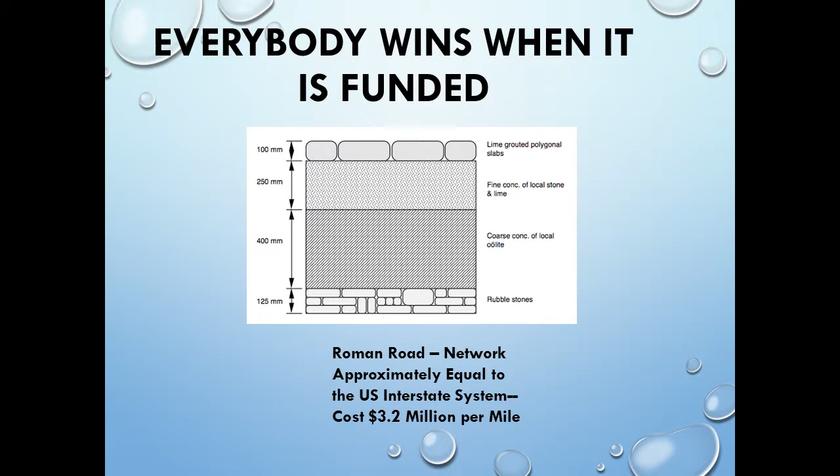They actually conquered the world at that time, and they did it for military and for commerce—it wasn't just for war. They knew they had to have good roads.

So if you haven't figured out, the first two presenters just set this up great, and thank you very much—it made me feel good. So I always use this slide.

What you look over there where you see the little cloud, that's the Highway Trust Fund, 1993. I'm going to walk you through the implications, and there are actually 3 of them. You'll see the different consumer price indexes for the different products.

So there's a couple of messages here. We do life cycle costs going out 30 years, 50 years using consumer price index, but it doesn't map back anymore to the different products. So that's something we've got to do differently. But look where that big cloud is in 1993 on the trust fund.

What you're looking at on the bottom is the time scale. The vertical axis is everything back to 1958 dollars. Nothing big there—what does that mean?

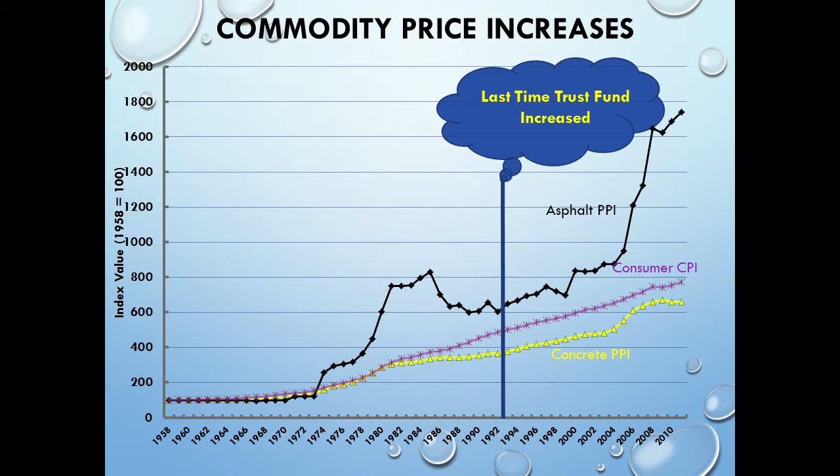This room, we all got together in 1993 and said, let's fix 100 miles of road or build 100 miles of road. We'd have a cost, we'd go out and do it. If we try to do that today, we can only build 67 miles. We've lost 1/3 of our buying power. You've heard that before, and that's what everybody talks about.

Look at the bottom side—I'm calling it the Arizona consumption rate because I do this for individual states. I'll show you a U.S. rate, but in '95 we drove about 40 billion vehicle miles, and in 2014 it's about 60 billion. That's a 50% increase in wear-out rate and 1/3 loss of buying power.

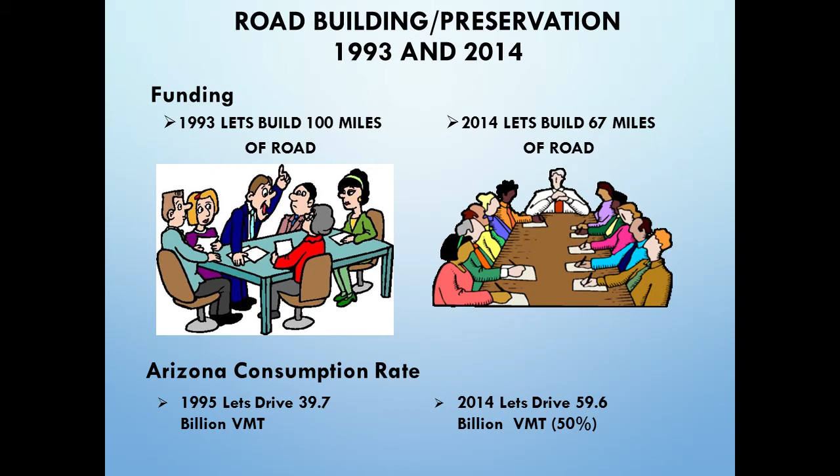Two of the three things—can't win, you've heard this argument before. So here it is nationally. If you look at the green line, that's showing you the vehicle miles of travel. The brown is showing you new construction. Obviously this trend is not going to change—we're going to keep having more and more wear-out of our roads.

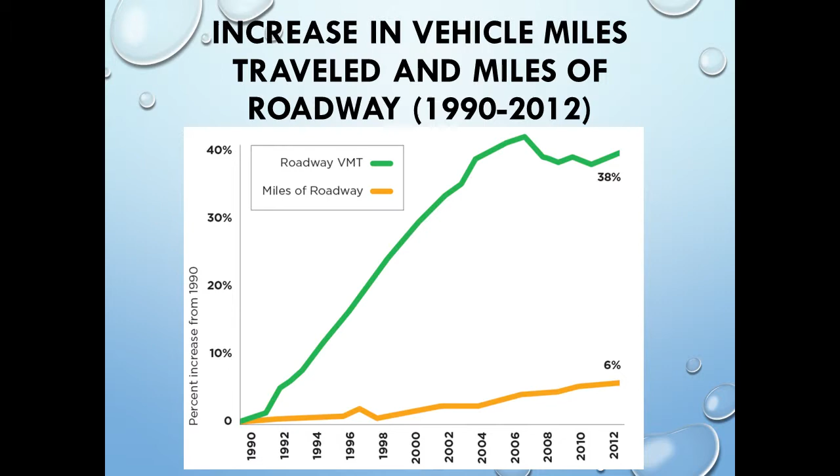Well, here's the one that doesn't get talked about much. I've shown the gas tax again in 1993 in brown, and you'll notice both lines—the blue one is the car. This is legislation mandating the fuel efficiency of vehicles. The blue is cars, the red is light trucks.

So we've been humming along, perfectly horizontal till you hit about 2010. In 2010, look at number 8—new car and light truck standards established for 2012 and 2016. Notice it's starting to shoot up. Now I drive a 1998, so I'm still smoking up the world with bad fuel miles, but eventually the fleet is going to catch up with us.

So we have less buying power, our wear-out rate is increasing, and now we're not going to generate the funds because of fuel efficiency. And if you look at number 9, 2017 to 2025, look where that's going.

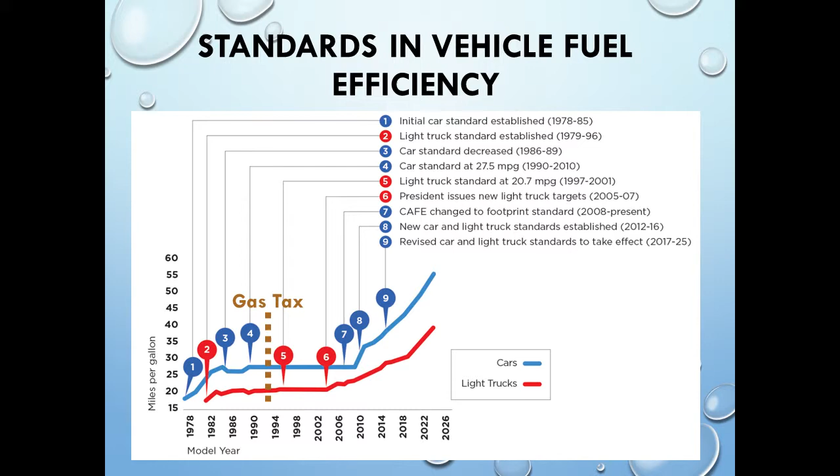And that's by legislation. So you can argue that Congress passed transportation legislation, though there's questions of whether it's funded or not. So this is my message: every one of us needs to pass the message on funding. We can talk about preservation all we want, but doing less with nothing isn't preservation. We've got to go back to planning and programming and have a vision of where we're going. That's one of the messages I'm going to leave.

Now, I'm supposed to be talking about urban. Okay, what is urban? I left New York and moved to Arizona, so I left farm country and went to what is now the 6th largest city in the United States. I think I'm rural, used to actually be on a ranch at one time. So everybody thinks that way out west - we're all rural, we're not like back east.

So the first thing I went to is Wikipedia. That's who gives the best definitions. And if you look at the European version, you have hamlets and villages and a whole bunch of cool stuff like that. I said, that probably doesn't apply.

So I went to the census. The census defines it as 50,000 people or more is an urban center. It doesn't give geographic range, or if it did, I missed it. But they call urban clusters 2,500 and more. So if I go 2,500 up, that's almost all of us, right? So everything I'm going to tell you applies to almost everything. And then I added the rural as everything else, because I don't know what that means.

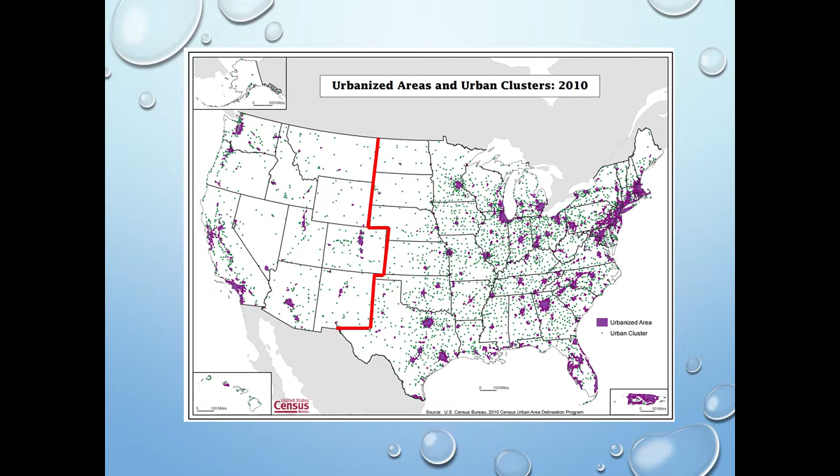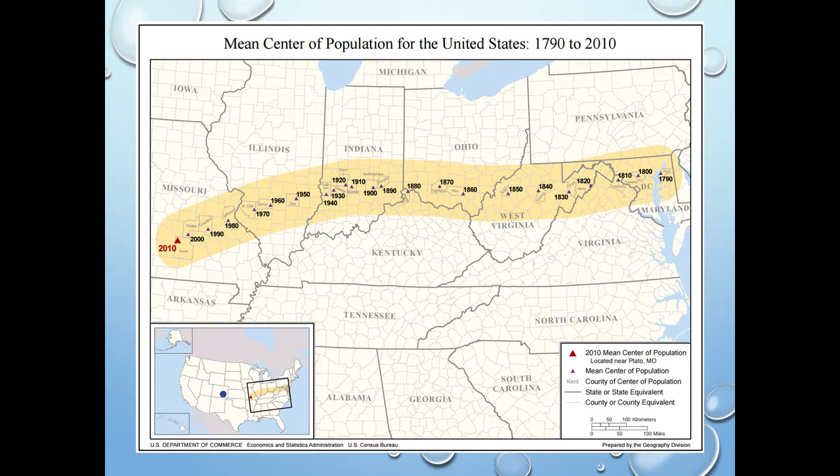Okay, this is when you know this guy spends too much time in motels. If you look at the slide in the lower left-hand corner, that's showing you how the geographic population center of the United States has shifted from the beginning. I put that little blue dot in there because probably in another 50 or 60 years, it's going to be in this region. If you look at the top, you can see the years by which it did it. I was actually stunned when I came across this, but people really do spend time on some of this stuff. But anyways, we're not as far away from the rest of the country as we think. It also explains a lot about Congress.

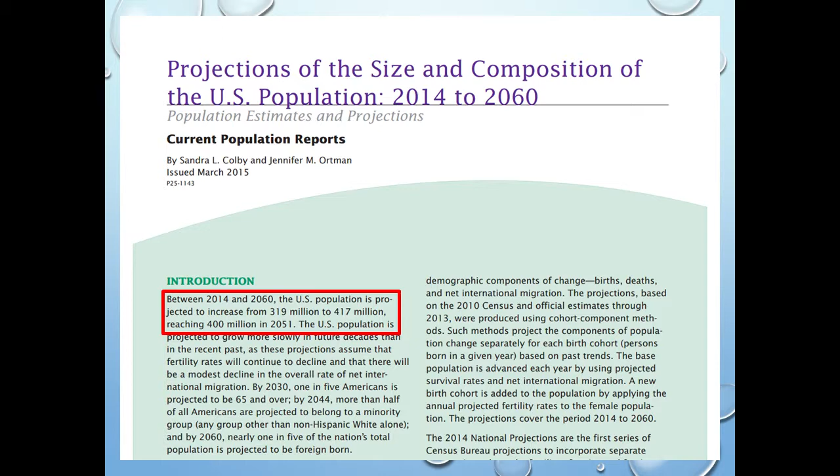This is another 2010 slide. This is showing you the high density places, and I'm going to show this slide near the end of the presentation. If you look at the bar right here, on the far right hand corner, that represents 20 million people. So like LA is 15 million people. The reason I say that is preservation treatments in those areas are different - the treatments are the same, but how you go about it is different. I'm going to talk about that. So when we say urban or rural, the same treatments are used in all the different areas. There isn't any magic out there. The application of those and the product selection is what's different.

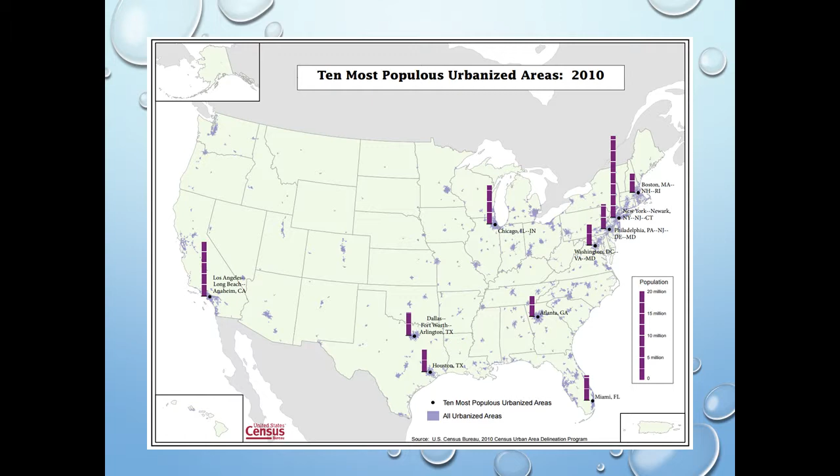I'm going to go into that later on. This is an FHWA document, I think you heard quoted earlier, and I'd recommend everybody read it. The only thing I didn't like about it is all the solutions were mass transit, but like I said, I'm a rural guy. It's a very good document for opening your eyes up, because most of us don't think about the road down the way.

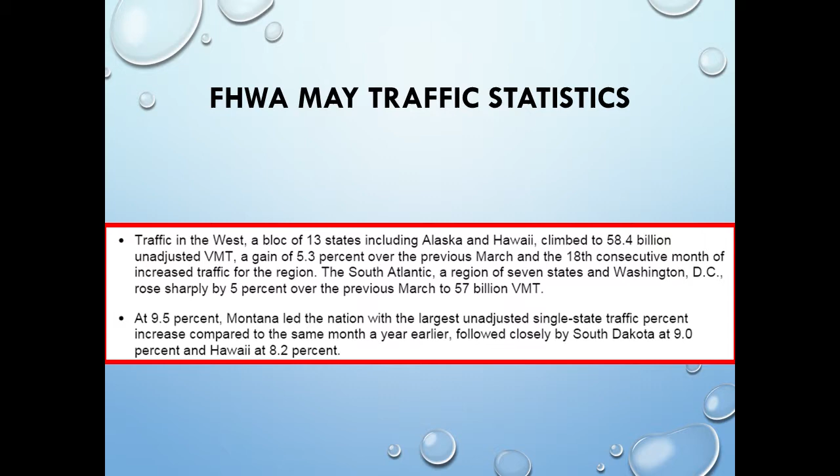So I'm trying to deliver a message here. If you look at the two bullets, traffic in the west, a block of 13 states including Alaska and Hawaii, climbed to 58 billion unadjusted vehicle miles of travel. Okay, if you look at the second bullet, at 9.5%, Montana led the nation with the largest unadjusted single-state traffic percent increase compared to the same month a year earlier. I would consider Montana rural. It's not.

Okay, there's the 70 million. So like I said, it depends where you want to get your statistics from. That's why I showed both. I don't have any dogs in this fight. But one of the other ones you see down there where it says you spend 40 hours a year stuck in traffic, I can show you another one that says you spend your 2-week vacation stuck in traffic. So if it feels like you don't have time to do anything, there's probably a good reason.

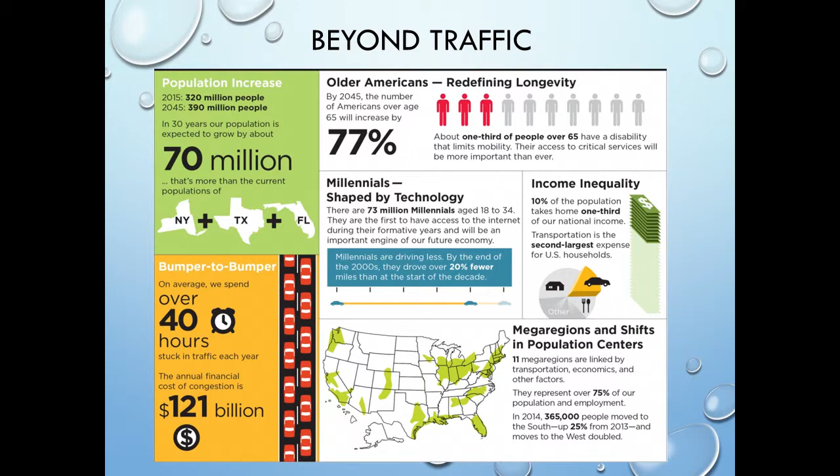And we heard reference to the major clusters. That's the lower left. Sorry guys, I can't... well, maybe I can do this. There we go. Yeah, you guys got a brain after all. These little green things are the major urban clusters. That's how they're envisioning them coming out.

Again, this is population - the darker, the higher the population change. I'm just trying to reinforce this idea. And here's the congestion. If you look at 2011 versus 2040, there's going to be a lot of peak congestion in the Rocky Mountain states. You're not going to run from it.

Okay, now we're going to get a little closer to preservation. The other thing I want to announce to you - next year is the 125th anniversary of the first concrete pavement ever built in the United States. And you're looking at a picture of it right there between those two red lines. That picture was taken in 1925.

Now these guys - to show you that life hasn't changed - the city wouldn't let the contractor do what he proposed. The city said no. He had to post a $5,000 bond in case it didn't work, just to go build it at his own cost. And he did, and it worked. How long did it take to set up? Actually, you could walk on it. It was more almost like RCC today.

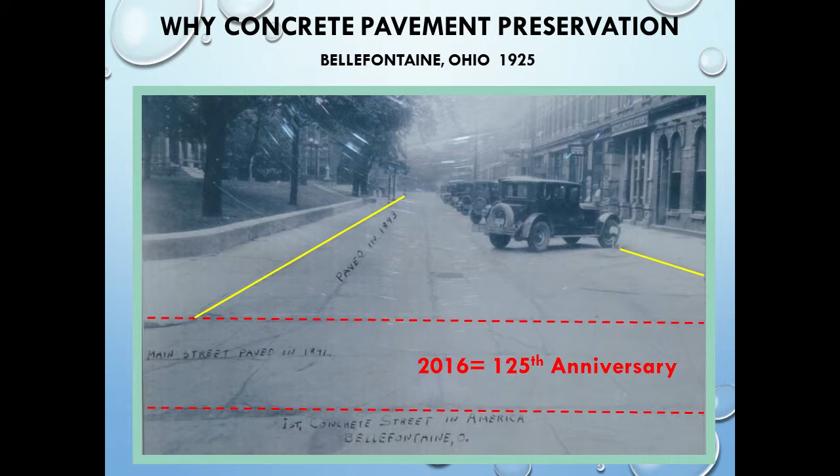It's 5 inches thick. So those yellow lines you see right there - next year will be the 123rd anniversary of the longest pavement preservation concrete project in the United States, probably the world. That project still stands, and that's what it looked like in 2012. So think about that. Point is, you can preserve pavements. You've got to have a plan. You've got to have a belief. It isn't easy - this thing looks tore up, there's no question about it. But it can be done.

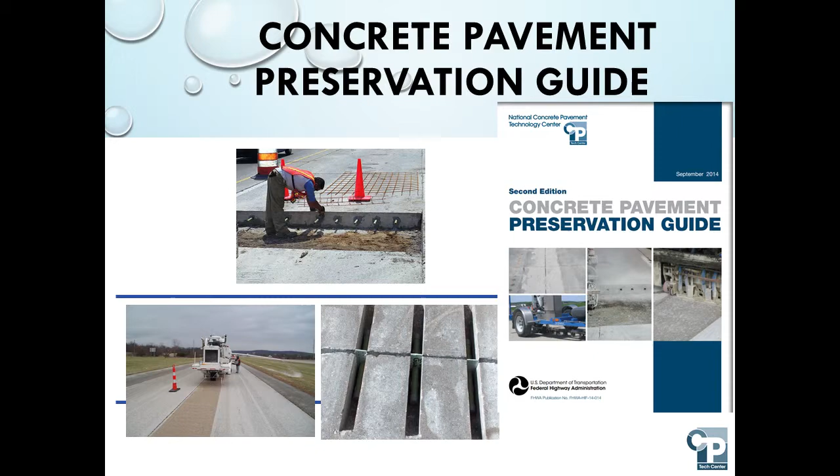Okay, taking it closer to preservation - if you want to get into concrete pavement preservation, the CP Tech Center in 2014 developed a manual. It's the best thing going. I would encourage anybody who hasn't read it to get it and look at it.

Okay, here's the typical pavement preservation treatments for concrete. And the thing is, if you haven't heard me before - anything you do to concrete pavement, I consider preservation. I don't get into the semantics of what that means, because the pavement doesn't care, it just wants me to make it last as long as I can. So what you're going to hear me use is the term 'best value.' I'm not so concerned with the point of what it's called when I'm doing it, as with what's the best value of when I apply it. And so that's what I try to dictate, how I think.

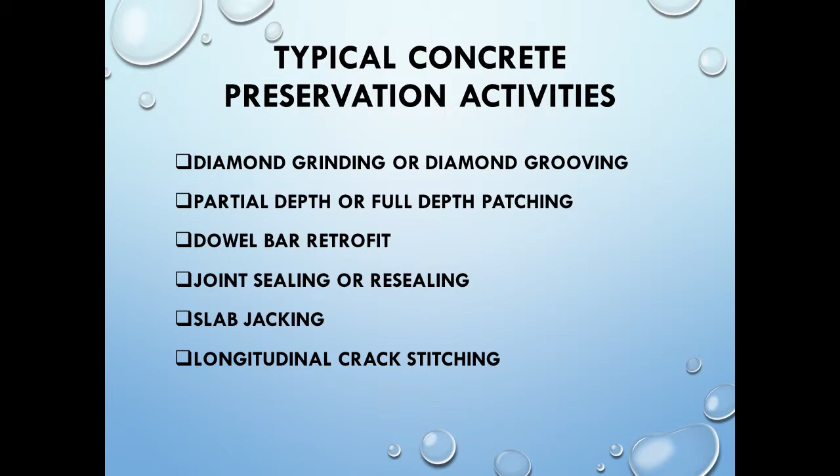So you got diamond grinding and diamond grooving, and they're two separate products, just so you know. Partial and full depth patching, we'll get into all these. Dowel bar retrofit, joint sealing or resealing, slab jacking, and longitudinal crack stitching. It's going to be the same treatments no matter where I do them, whether I'm out on a road of 500 ADT or 500,000. How I do it and go about it, the products are going to be quite different.

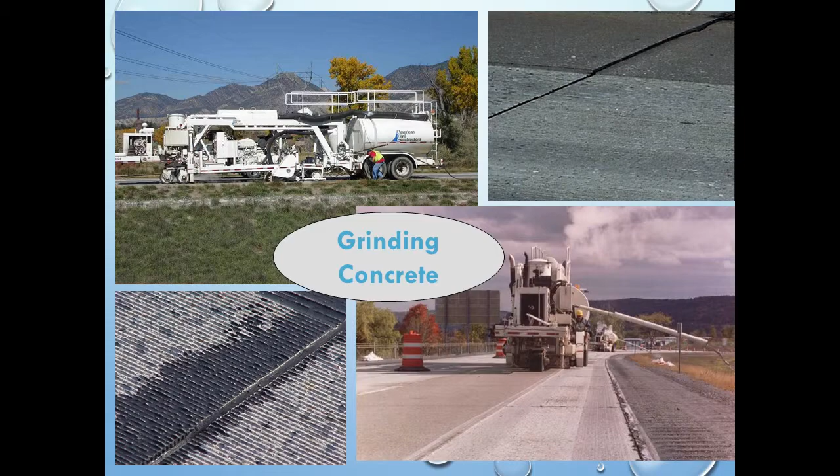Grinding concrete, one thing I want to point out, let's do it with the mouse. Notice this little guy right here, this is called slurry disposal. This gets harder and harder to do in urban areas. I'm going to talk about this more later on, but I just want to make sure you see that picture and how that's being discharged.

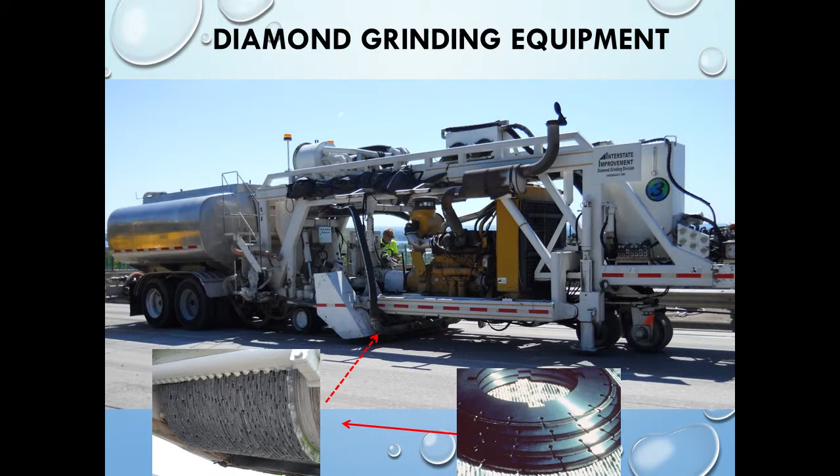If you had any ideas of what diamond grinding is, it's just a series of blades. You can see the blades, you stack them all together, it's called a head. It goes back up underneath. There's where you got the blades, you put them on a stack, the head runs this way, and it grinds this way. So you're removing a thin layer of concrete.

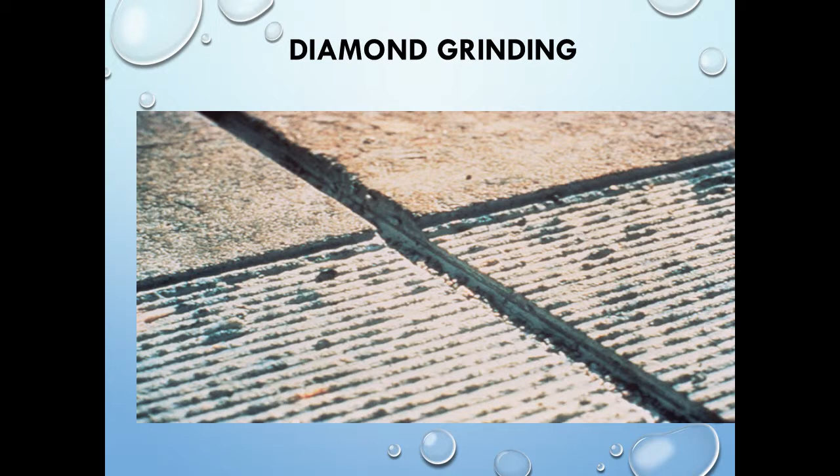That's what it looks like. This is the most used concrete slide in concrete preservation. Someday one of us is going to get out of the car and take another picture, and you guys won't have to look at the same thing. But mark my words, when you see me next time or the next guy... This one I think was taken by Matt Ross back there, is that right? So Matt tried to get us to change, but again, I'm just trying to show you the corduroy texture.

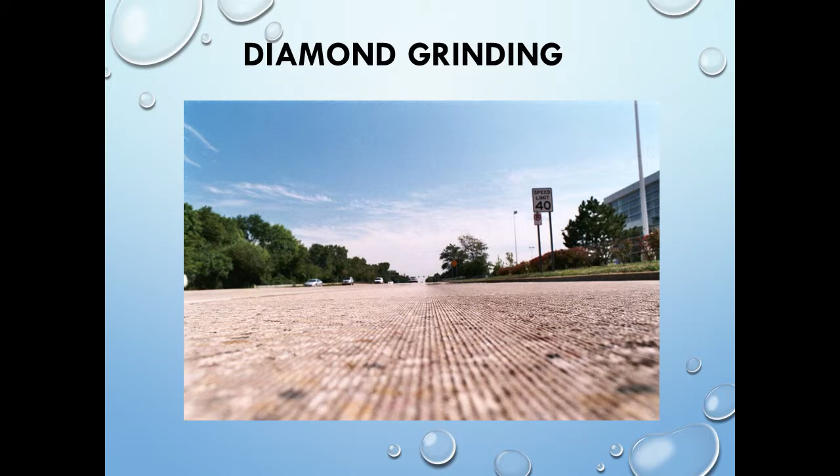This is diamond grinding, okay? So again, you're doing it for friction, which quite frankly, most of it is done for smoothness and noise. Those are probably the two predominant uses. It gets done for friction, but you can also do grooving for friction.

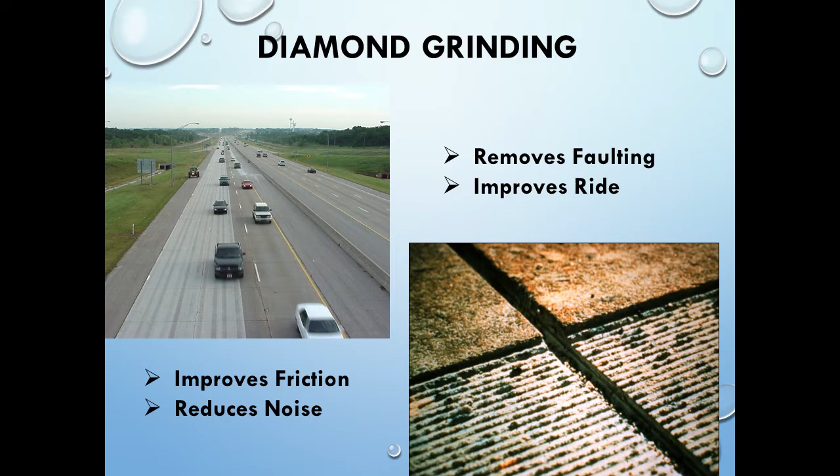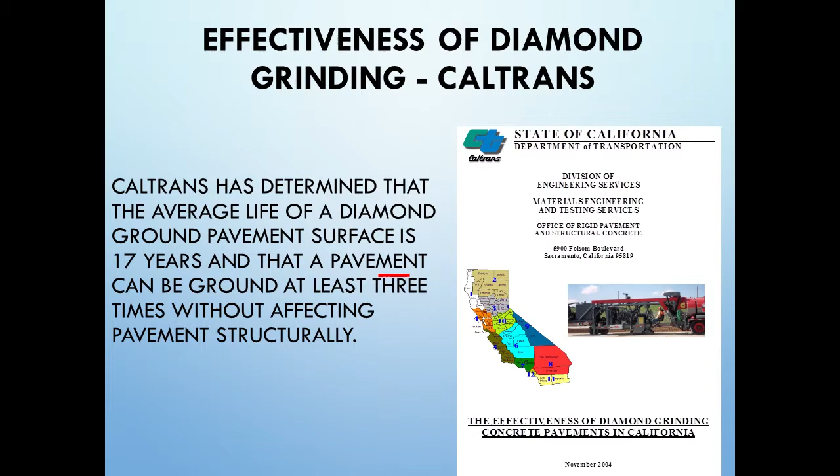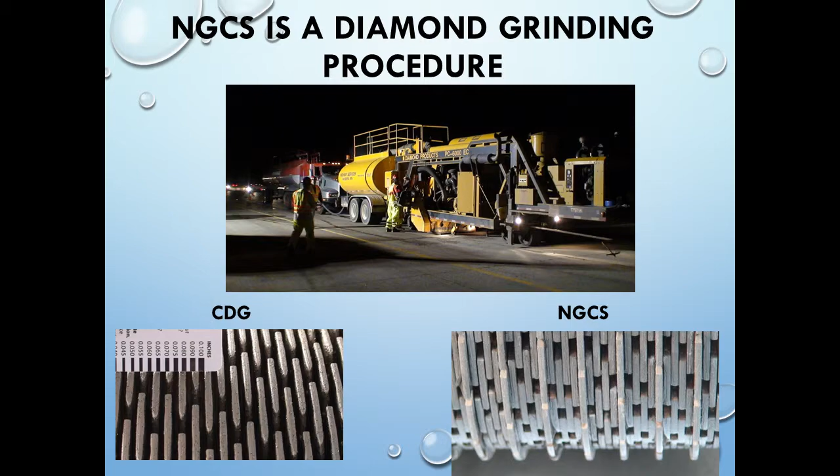There's also a texture called optimized texture for city streets. That's only been used in test sections, but if you ever need a finer grind, that's what it was developed for. The reason being, some agencies felt that diamond grinding was an issue for skateboarders and bicyclists. So on city streets, they wanted a finer texture, so we developed it, but the whole time we're thinking, why would you want bicyclists and skateboarders in your street? But so that's another story.

Okay, diamond grooving: those same blades I was showing stacking on that head will be about 3/4 of an inch apart, and it cuts a 1/8 inch groove. It's really done for safety. It's preventing hydroplaning. You'll get better lateral stability, so it's a safety measure. You're going to see us trying to promote it not against high friction surfaces, but in addition. It's probably 1/10 of the cost and can reduce accidents.

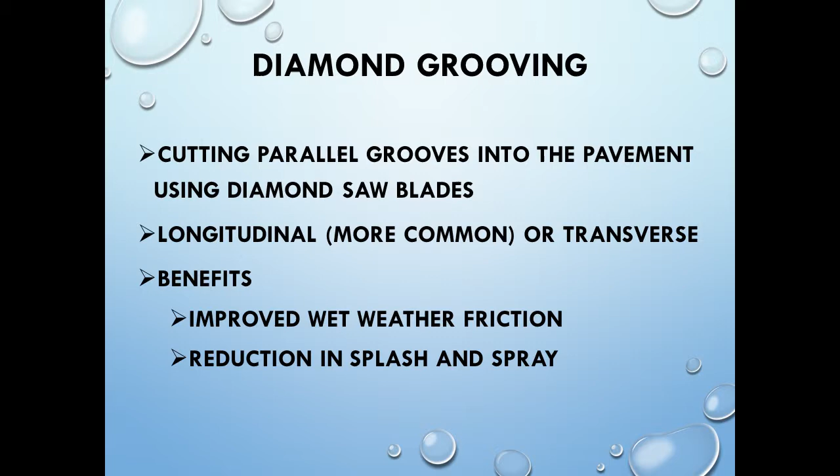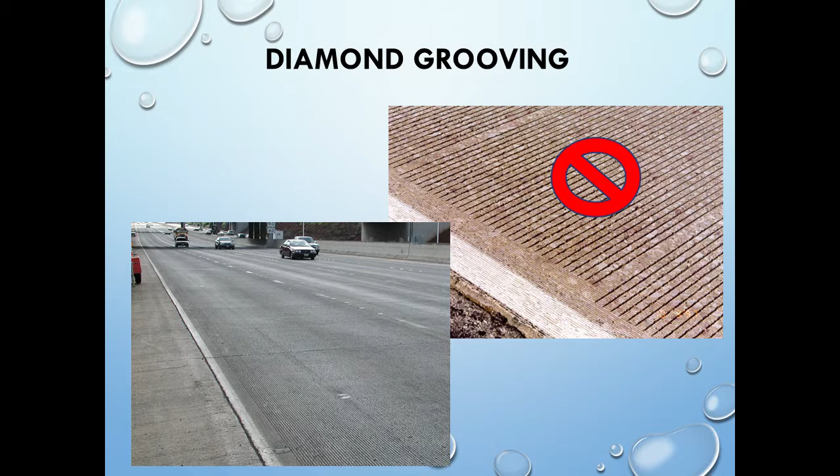You may do it on a hairpin curve if you have to, and that alerts the driver, but you always want to do it longitudinally.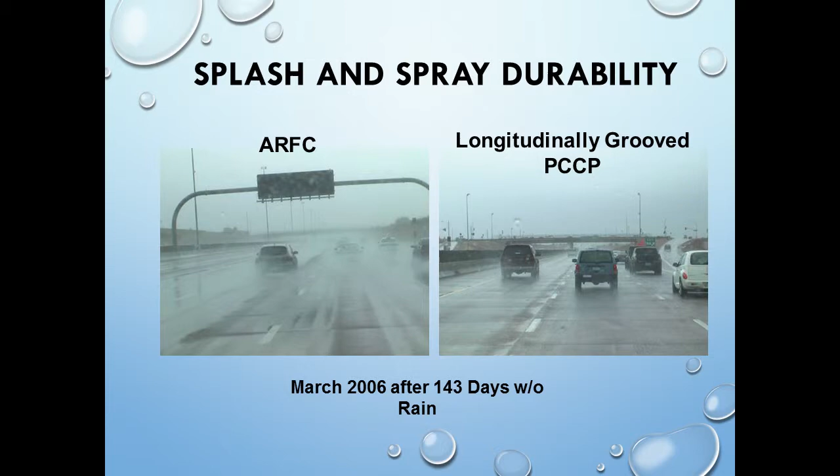Okay, let's talk about full depth repair. The next slide you're going to see says this is a workhorse, and you'll notice the difference. You can either pull out a portion of a slab, a whole slab, or multiple slabs. Who knows why we call it the workhorse? You feeling lucky?

We don't preserve concrete pavements. I can show you 50 years of that. We wear them out, and once we break them, we've got to go do something with them because the cars just complain. That's why you do full slab repairs. You should never have to get to that, except really, really far out.

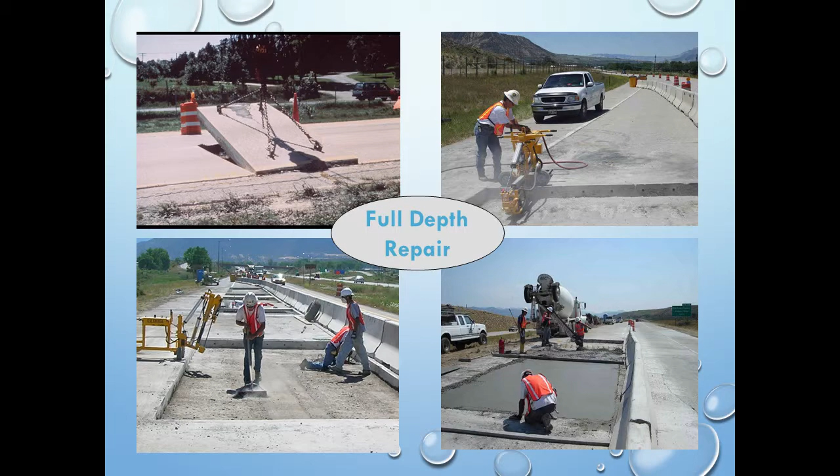Anyway, there's the workhorse treatment - replacement of the concrete at deteriorated joints and cracks. It might only be 2 or 3 feet of the slab. You notice it says focus on workmanship. If you screw that one up, you got a real problem because remember, you're going to try and get cars over that fresh concrete fairly soon. So it takes a little bit more care.

Thinking about urban areas, when you may only have a 4 or 5 hour work window, they've got to drive back over that stuff. So this is where the nuances come in different. You can see the accelerated materials, precast repairs - we'll talk about some of that. That's just showing you some of the activities.

I don't believe in what you're seeing there, that temperature steel laying on the slab. I show that so I can complain about it. I do that a lot when you get old. I don't believe in it - there better be a really good reason to use temperature steel.

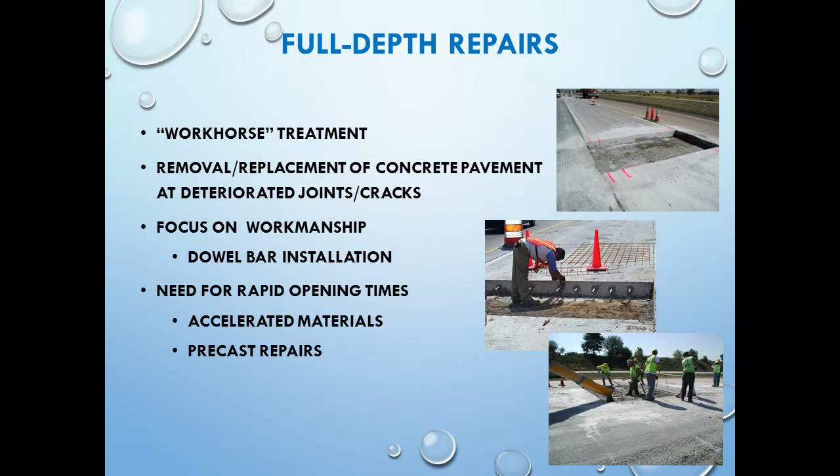Full depth repairs - this is how ugly it can be, and probably most of us wouldn't consider this a real high density area, but you can see this is just like a war zone. My guess is traffic's light enough they can survive this, but you can just see how hard it can be to place some of this stuff and have it last.

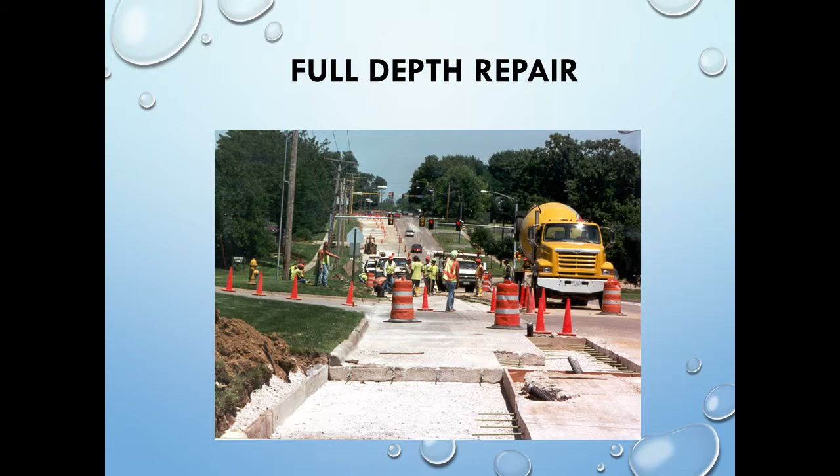Remember it's value. The message people like me like to sell is get in, get out, and stay out. It's really a catchy saying. What you really want is value - what's the best value and the longest performance? That's really what you want in your system.

Give you another example of things I wouldn't do, and this is actually a real job. I would have cut that out right there and fixed the whole thing at once. This might be a 50-year-old pavement, and he's leaving that part in when it's not going to cost that much more because you're already there doing the work.

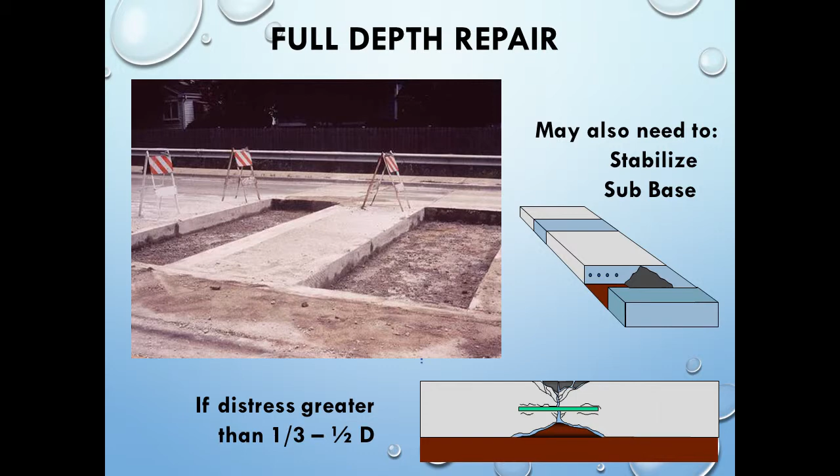So things to think about, examples. This is one everybody goes, that's reconstruction. What you'll find, a rule of thumb in the business on full depth repairs is 10% slabs. I can show you agency after agency and report after report that somebody came up with that number and everybody copies it. In Minnesota, I went on a job and every single joint was being replaced, and I couldn't believe it. I said, you got to be kidding me. And they got another 20 years out of that pavement - they ran a cost analysis to see what's effective. So the number of slab replacements should be based on your costs and your data, not on rules of thumb.

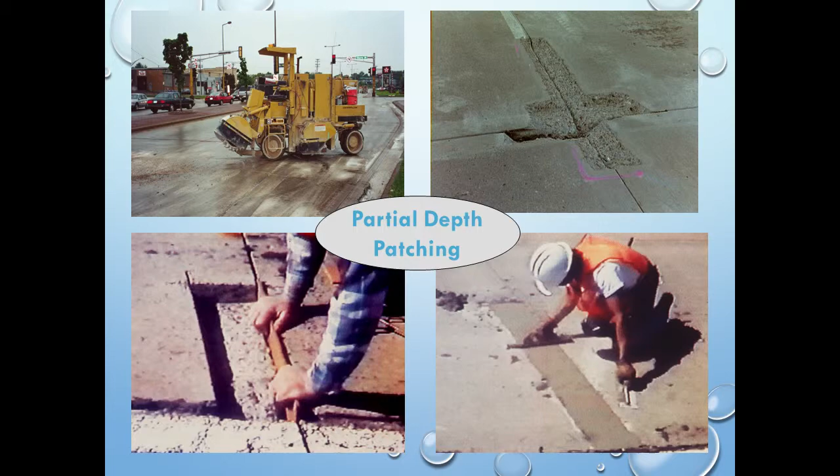Partial depth is where you're doing a smaller segment of it. You can see on the top, and we're going to talk more about it, you've got the milling operations, and this is the more traditional where you saw it out and then replace it. We'll go through this.

This is what most people would call spall repair kind of fixes. Always understand what caused what you're repairing, because if you don't, you're probably not fixing it. And I say that making 40 years of mistakes, so don't do what some of the rest of us have done. Figure out what's actually causing it. With spall repairs, hopefully it's a construction defect, that's been my experience on a lot of them, but if there's something else going on, like steel location in the slab, you need to figure those things out before you just go repair it.

What you're going to see now is coming from the Midwest. They have a lot of joint-associated distress, and you're seeing milling. It's a lot more cost-effective to mill these things out, and a lot faster, and you'll be able to see a picture of it here. That's what it looks like. 20 years ago, all of us old-timers would have said that's not how you do spall repair, but they've been doing this successfully for 20 years. You can see where they replaced the whole longitudinal joint in that section of pavement, and they can do it quite cost-effectively. They have to, it's actually deteriorated. Out west, we don't generally see that kind of an issue.

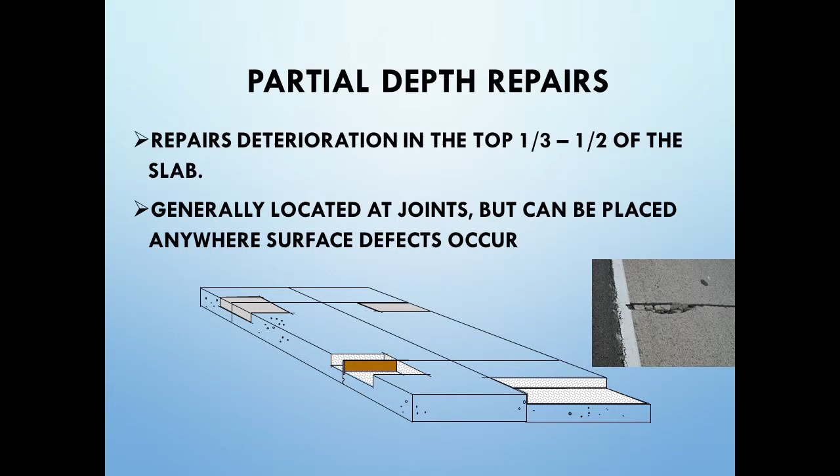Okay, again, partial depth. The other thing I'll point out, in the old days we always said T/3, don't go below that. Now the new procedure is you can go half the depth. My guess is that you saw that one corner repair right there - I'm pretty sure that one was a full depth, so it can be done, and people are doing it.

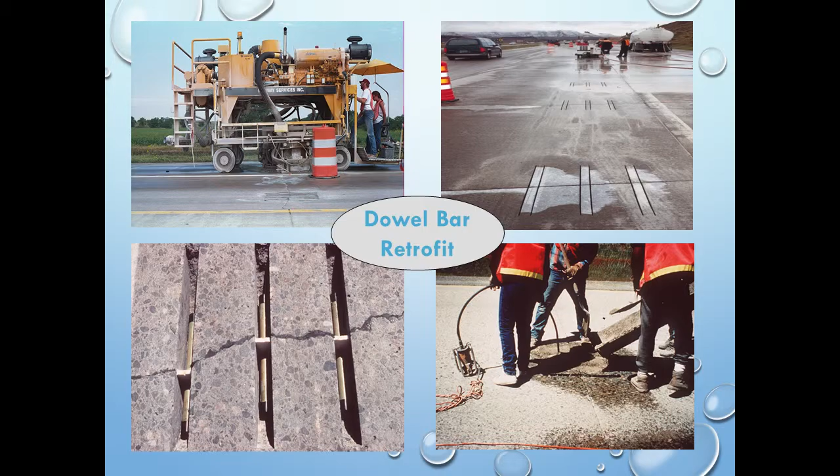Dowel bar retrofit - what you're seeing on the top is the actual type of equipment. This machine just cuts these slots, then a bunch of guys run in there with jackhammers and beat them out of the ground. And so you end up with slots like this. Notice this is a crack, not a joint, so you can do both. Then you come back in, you have your dowel bars in there, and I'll show you some more on that. The issue here is making sure, looking from the top down, that your backer board is beyond your excavation point, in the same way in the cross-section view.

If you don't, the concrete's actually just going to be touching each other. When you open up the traffic, come back the next day, you'll already start some of that spall repair stress starting for the next project. So on this particular application, you've got to make sure there is really good quality. And the other thing to remember with this partial depth or full depth - if I'm talking about an area with 20 million people living in it, it better be set up really, really quick. And that's when it gets into more exotic materials and issues.

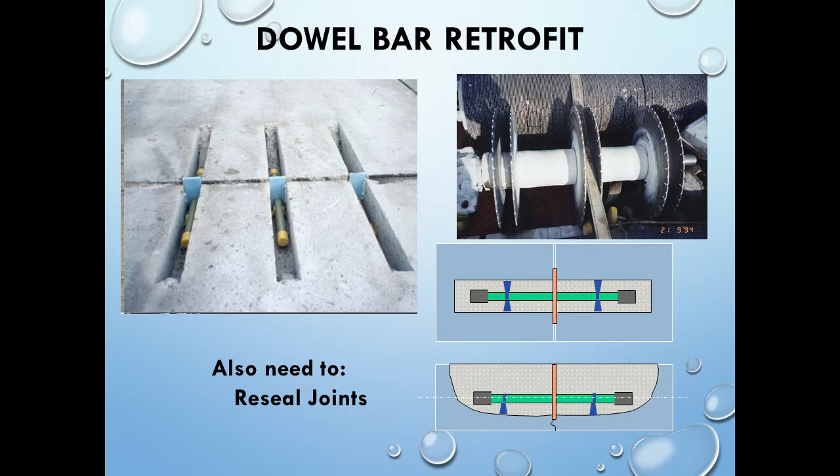That's what the saws look like. They're just setting a spacer right there. Again, just showing this is a skewed joint, so crack, skewed joints, transverse - doesn't really matter.

One of the reasons this slide's in there, I want to point out, I recently did an evaluation of the LTPP SPS-2 experiments, which was the concrete new construction back in the early 1990s. They're about 20-25 years old, so we went back and looked at the data. When you look at the load transfer efficiency on some of those, there was a brand new doweled concrete pavement that after 1 year fell below the 60% criteria, and 2 years later was at 90%. There's probably an issue with the load transfer efficiency trigger, so if you're using it, look a little closer - there's other things that come into play on that.

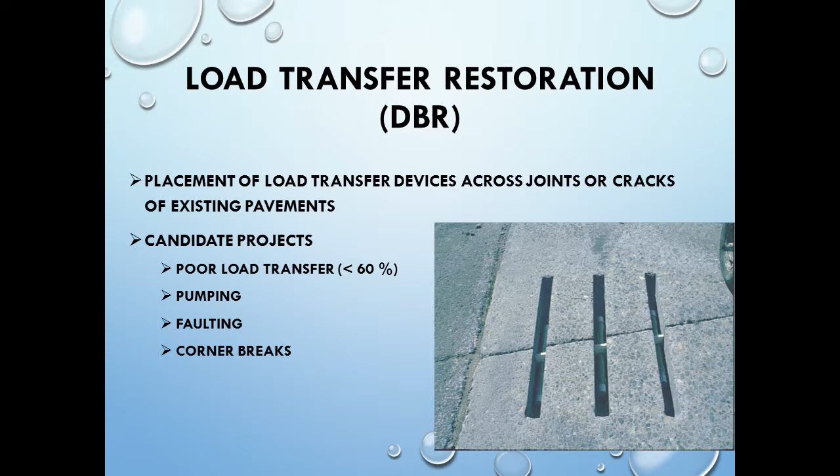Sealing and resealing - this is probably the most controversial thing in the concrete industry right now. I can get in a fight on either side, I've been on both sides of it. The issue is one size doesn't fit all, and that's what we always try and do. So eventually we're going to figure out, I hope, at least in somebody's career, probably not mine, when do you apply it and when don't you. It represents 5 to 10% the cost of new installation, so we darn well ought to know whether it's cost effective or not, and we really can't.

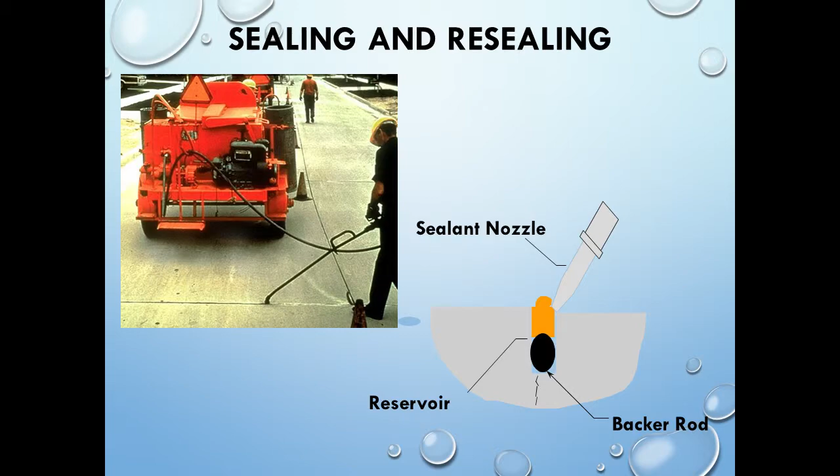One thing I'll mention, in the urban areas, even Wisconsin, who led the charge back in the 1990s to unseal, to not seal, actually uses it in the urban areas below 45 miles an hour because of the incompressibles and the slab growth. So you're pushing over curbs, catch basins, and getting slab blowups. Slab blowups in the Midwest are still going on - people don't talk about it anymore. I actually thought it had ended about 20 years ago, but as we've looked into it, it's a lot more common. Actually, Colorado just had some 3 months ago, and Washington had some this last summer too, so it is going on.

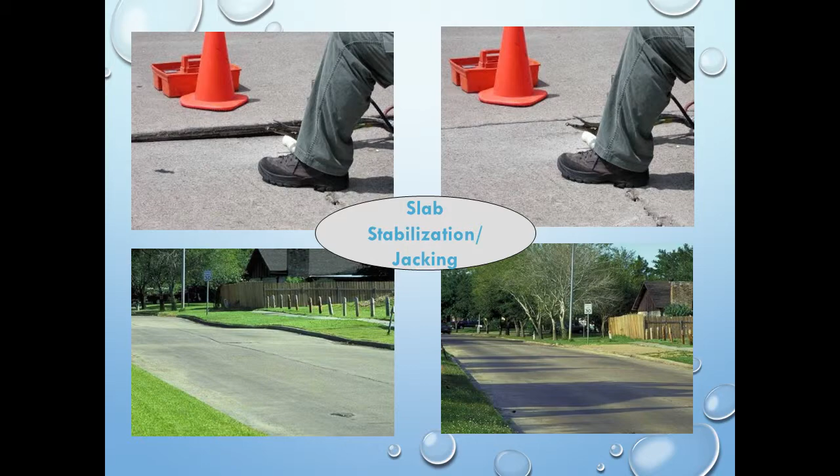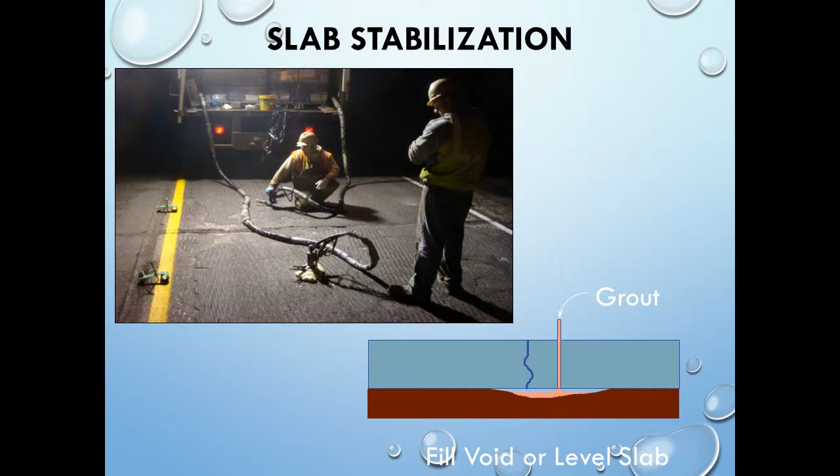Slab stabilization, on the other hand, is where you're really trying to fill the voids underneath the joint. So there are different approaches, and make sure if you're speccing it, you know which one you're speccing.

Cross stitching is where you're coming in and taking rebar, putting it in at an angle, trying to hold together longitudinal cracks. If longitudinal cracks aren't moving, you can have pavements that are really old that have had longitudinal cracking. In Arizona, where I'm from, we used to build the Phoenix Freeway system, and I was one of the residents on it. We did our ramp 16 feet wide with no longitudinal joints, and every one of them cracked. They're still there, still cracked, and some of them are 40 years old. So a crack is ugly, but doesn't necessarily mean it's bad.

What I want to point out here is that you're putting this in at an angle, notice the angle over here, but this is what's critical: if you get too far, you can blow the bottom of the slab out. And if I'm the one who just did it, I'm pretty sure I'm not going to come tell you that I just blew out the bottom of your slab. You're standing on top looking down, you don't know that happened, so you're probably going to have a future performance issue. If you're doing this treatment, it's very effective, you just have to make sure someone's checking they're not drilling too deep.

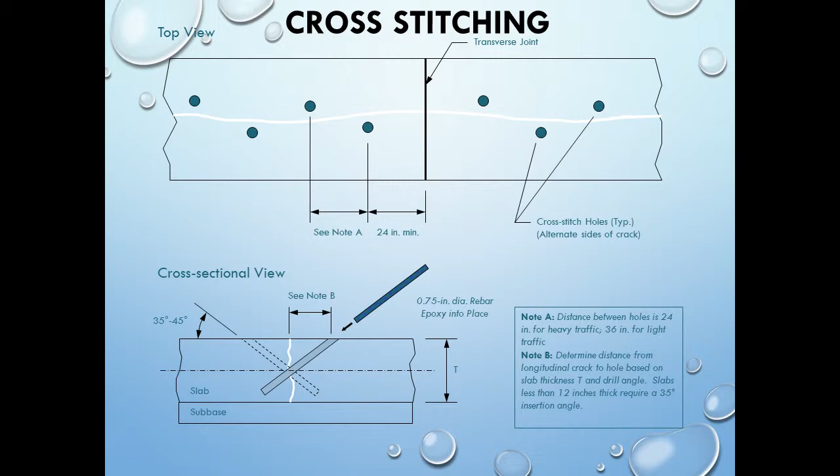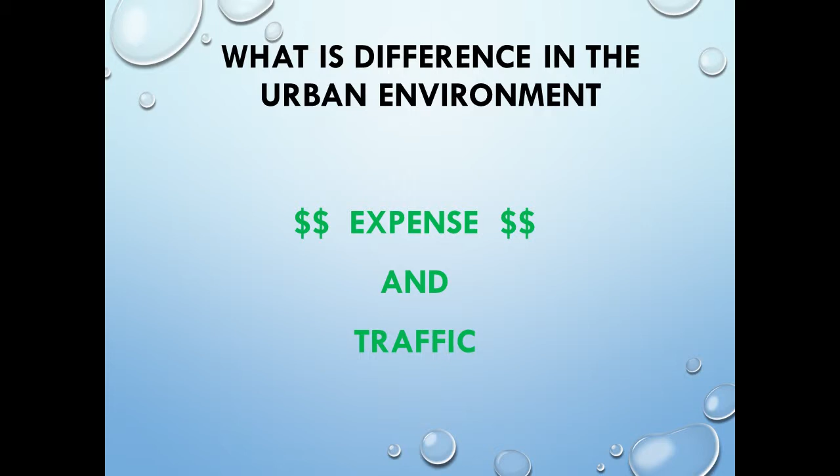What's the difference in the urban environment? I actually talked to our contractors to get you answers, and this is a universal one. The other difference is going to be more obvious, not so much because it's disruptive, though it is. You get into these high density areas, there's no way anyone's going to do any work in an urban area without it being disruptive. But it's also hard on the contractor. He can't even get some of the same equipment onto some of the job sites, so he's got to look at where he's getting his water from, where he's getting the slurry.

The other thing I'll mention, particularly in what we might call these subclusters, is when you really start getting into smaller communities, you're dealing with concrete pavements that might be 60, 80 years old. They also have all kinds of manholes, water valves, curbs and gutters, and they're in poor condition. So it's a much more difficult thing to accomplish, and I'll show you some pictures.

Even things like lodging, you might not even be able to stay in the area. Obviously the productivity is a lot lower, the jobs are smaller, more difficult schedules. Maintenance and protection of traffic, that's obvious too. I asked two contractors about the inspectors and the general public walking by, and one said, yeah, they're always there, but we don't listen to them. I said, okay, doesn't bother you then. Let me back up, I missed a really important point.

Product selection, that's where the differences are going to be on these kinds of things, the products you're going to use. You saw this earlier with Jason. Even the FHWA requirements are different from the higher density areas.

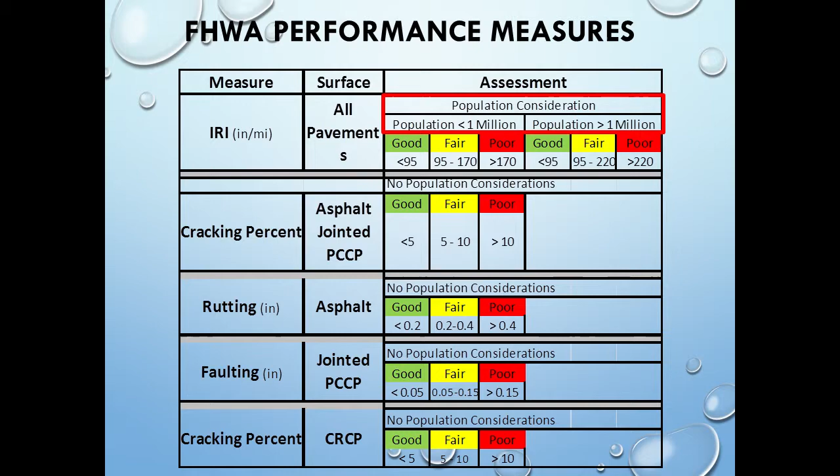So now I'm going to get a little bit more specific on diamond grinding. The slurry disposal, remember you saw that piece of equipment with the arm sticking out, shooting stuff on the shoulder. That's not going to happen on an urban street because it'd go into the stormwater drain, so you've got to have some way to collect it.

There's some way to get rid of it, but the haul distances are generally farther, and you may actually have to treat it prior to disposal. Notice the one that says suburban level of expectation is more difficult - that was really interesting coming from the contractors. What it really says is, I've got this old 90-year-old street, and when you're done grinding it, I want it to look like brand new. That's a real challenge, and I'll show you a picture on why. You've got manholes, water valves, interchanges, all those kinds of things.

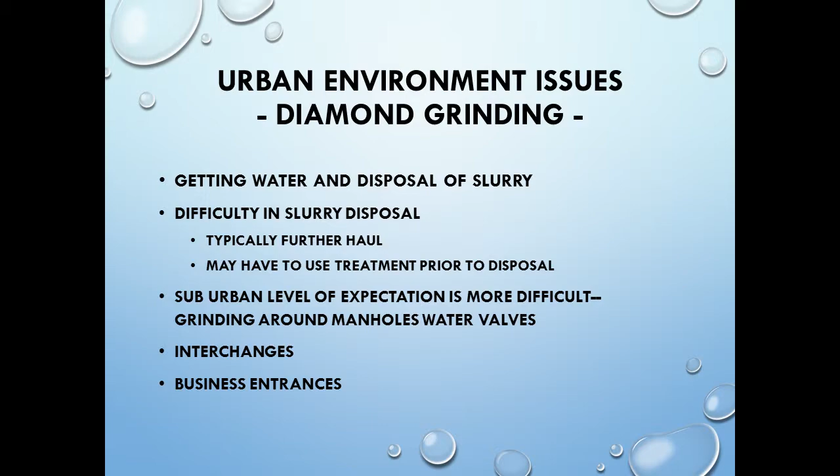So here's an example of what I'm talking about. You've got two choices. Remember, we can make it as smooth as you need - people don't believe this, but that's generally not ever going to be the issue. The only way we make it smoother in diamond grinding is by removing something. So if you want me to remove 2 inches of that 7-inch thick pavement to make it as smooth as you want, we can do that, but it's just not a good value for you guys. So there's always a trade-off on value between how smooth you want it versus how much removal.

If you'll notice these dark spots here, there's the water valve right there - that's where they scored around it. So what the grinder's doing is coming up and lifting up, coming back down the other side and continuing. Now there'd be an alternative - the owner could say, I'm going to lower the water valve and make it smoother, and he'd have gone right through it. These are all choices that you have to make.

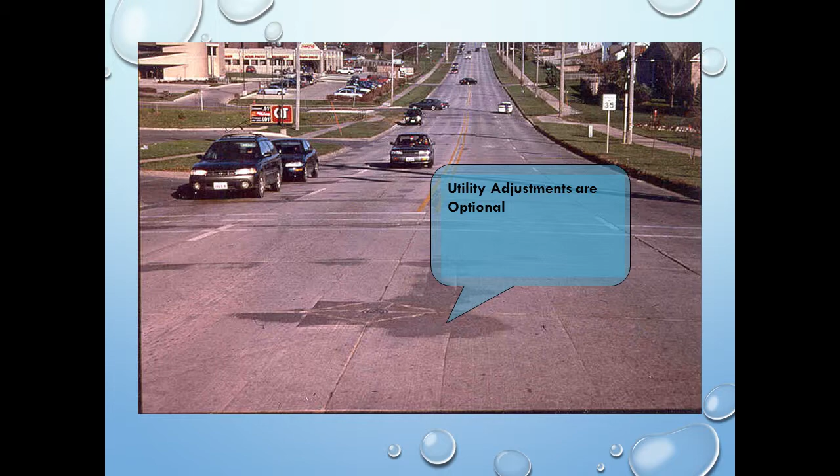This again is showing where they ground right over a manhole. Again, this is optional on our side - we always go down, same way on driveways. The only issues we have on driveways is actually access, and in an urban area, that always creates a problem.

The other thing I'll mention, this is the largest county project that I'm aware of that's ever been diamond ground. And this is a pretty cool community - it's Douglas County in Denver, Colorado.

To figure out what to do - these pavements were typically 20 to 25 years old and were faulted very badly. This is a more affluent area, this is where Jason lives by the way - just Jason, raise your hand so we can pick on another rich government guy. But they had like 7 and 8 inch thick concrete that's not doweled, and it was in many locations placed on expansive soil, no base - worst case scenario. And the people don't like half-inch faults because you've got some sports people living there.

So years ago they developed their own distress guide, created their own management system, did their own data collection, and finally convinced their council: we're going to go and repair all this, and this is how long it's going to live. And they did 500,000 square yards of grinding - Scott may have bigger jobs than that, but to me that was a horrendous project.

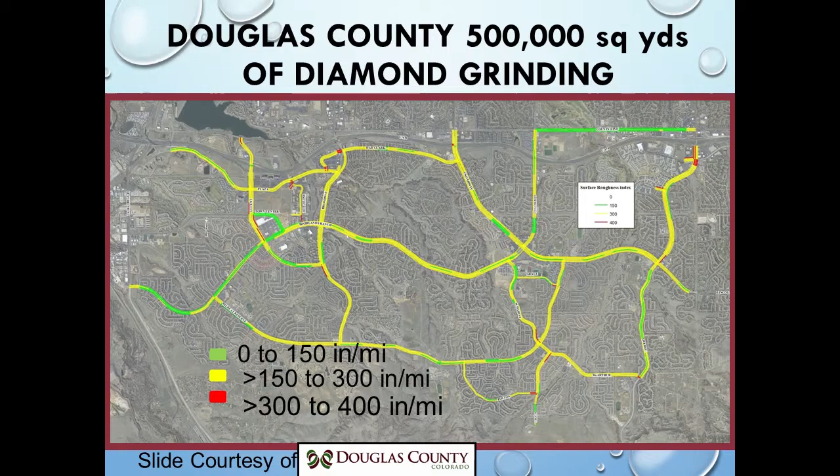But what this map is showing you is they actually went out and profiled their network that they were going to let out to work, and notice there's 3 different levels of roughness. They set their specs based on these levels, meaning the contractor wasn't required to get the same smoothness everywhere. Because they recognized that the 300 to 400 inches per mile, by the time you made that smooth, that 7 inches would probably be closer to about 6, maybe 5.5, and that isn't what they wanted. So this was a really good approach on how to keep in mind that you want a smooth road, but you want it to last.

Utility cut repairs - we could probably argue whether that's preservation or not. It's part of the new CP Tech Center manual. It's a necessary evil of life. I'm going to show you another picture right here - I don't care for it at all. That's not how I would have done that, but this guy probably knows more about it than I do.

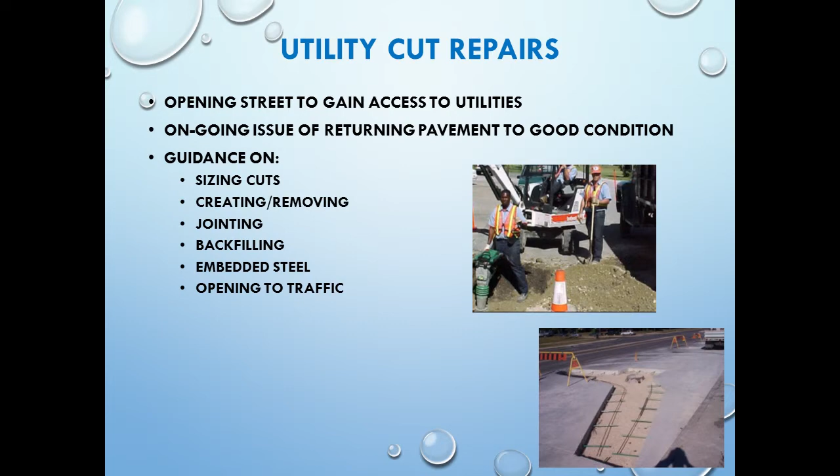Just to give you other ideas. For some of the other treatments, what's different about the urban area? It's just like location and real estate—product selection, installation procedures. It's completely different based on the window and the traffic demands.

You get into the 15 to 20 million population areas, and you're going to have work windows that are extremely short.

Robert used to have gray hair, and he started dyeing it. He's only 29 years old.

Because they have to deal with that. You get in the LA area and those kind of things, it's just unbelievable, or Chicago. And so you better have products that perform. If they don't, you're going to be back out there in actually a couple days. So it's a whole different world, and you've got to have some experience on that.

That's how precast comes into the picture. You notice I showed you that map earlier with the 15 to 20 million population centers. The states are looking at precast just because you've got to get in and get out of there, and they can do that very quickly. Most of them are still being diamond ground after they're installed, so it's not just a matter of setting it down and running off. The good news is you can come back later and grind them.

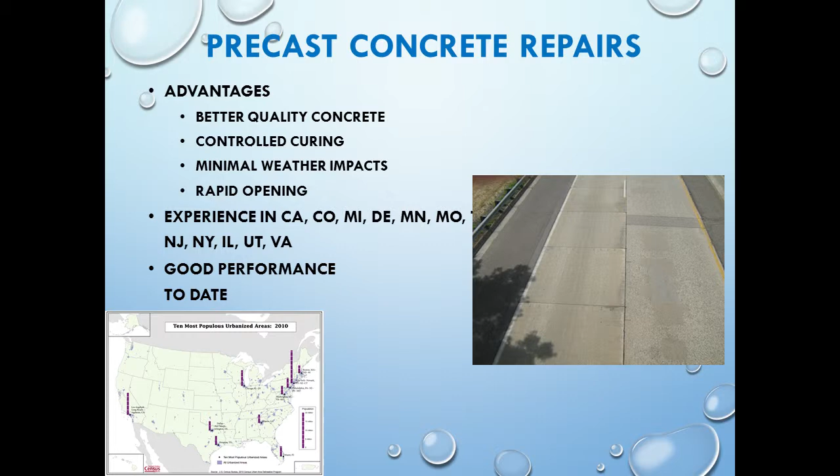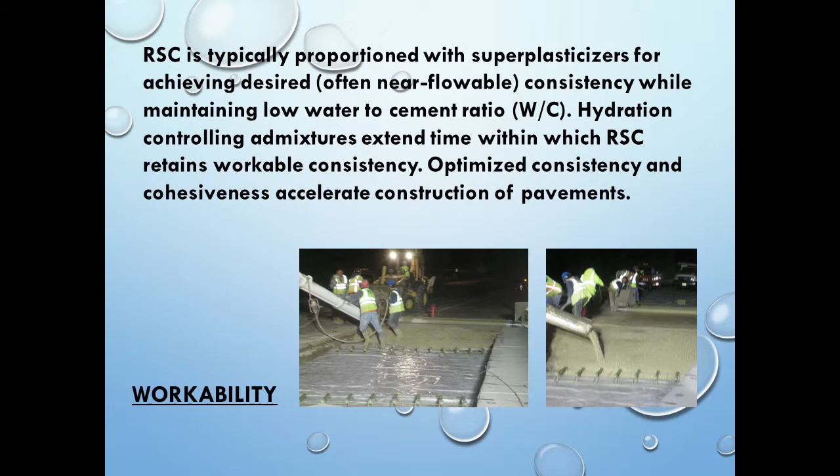So, rapid strength—it's not just precast. In California, they've developed a number of mixes that can accommodate this. I'm not going to read all that through you, just rapid strength concrete mixes, but I'll let you look at it. Just so you know, there is another option—you don't have to do precast. People have been doing those short windows, high traffic, with pourable materials.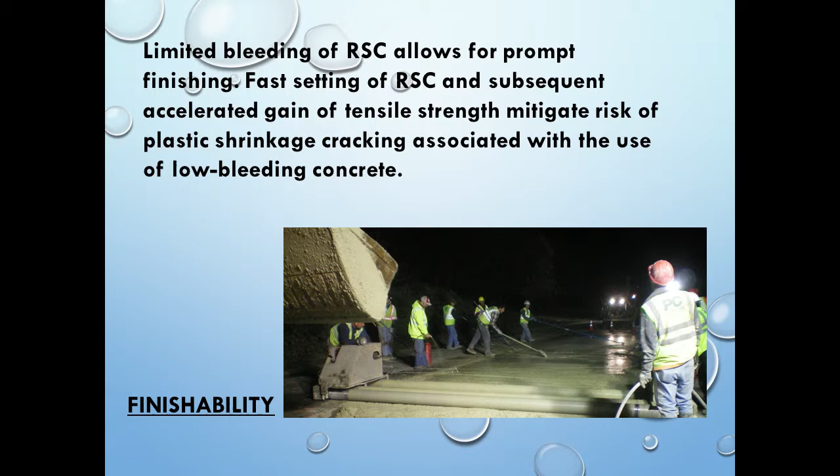So all kinds of issues are associated with it also. As with any of this stuff, it has to be done right, and the more exotic it gets, the more complicated it is. In summary, concrete pavement preservation works in all environments based on traffic and schedule. The appropriate techniques and products need to be selected. The treatments are going to be the same, but how they're accomplished is going to be different. And urban construction is generally more difficult and more expensive.

And just so you didn't forget the first part of the presentation, President Reagan passed a gas tax increase in 1983 and was reelected in 1984. So the message needs to be, if you guys don't pass a gas tax, you're not going to be reelected.

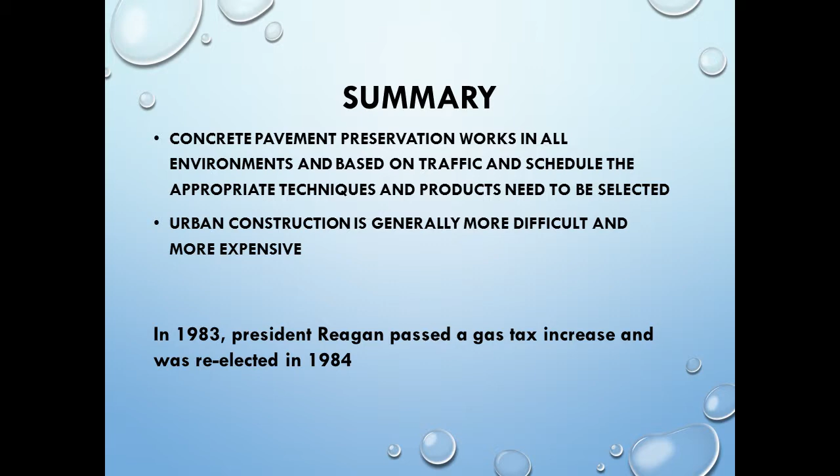So, Mike gave some talking points. Am I out of time yet? I can go for 2 hours. You know that, right? Okay.

What are the more common pavement preservation treatments used in urban areas? The same as everywhere else. If there's any questions, I'll answer that, but I think I covered that.

What are the benefits of preservation for concrete? How about a 123-year-old street? Is there enough PCC pavement preservation, or should there be more done? Every one of you ought to do complete concrete pavement preservation. There needs to be a lot more on just selling it.

PCC pavement preservation research—is it being done, or should more be done? Dr. Hicks is going to be talking about this tomorrow, right? Yeah, the LTPP 11 and 12, and there's also a pooled fund called SPS-2, which is also looking at pavement preservation on the LTPP experiment. The answer to the question is no—there needs to be a whole lot more research on concrete pavement preservation. That's a very fertile area for anybody who wants to go into it.

Suggestions on what state and local transportation officials can do to improve preservation for concrete. Remember I said why it's a workhorse? Because everybody just lets it go as long as they can. Concrete typically has lasted 2 to 5 times longer than it was designed for, and it doesn't take people very long to figure out it does, so they put their money elsewhere. The question would be, had you preserved it, how much longer would it have really lasted?

Examples of best practice for tracking preservation for concrete within a PMS—tracking and reporting performance of projects in PMS systems. In 2009, the Rigid Subcommittee of the FHWA Pavement Preservation Committee did a survey of state practices, and we got 38 states to respond. 60% of those responses appeared to have a trigger value, but not a single one of them was the same.

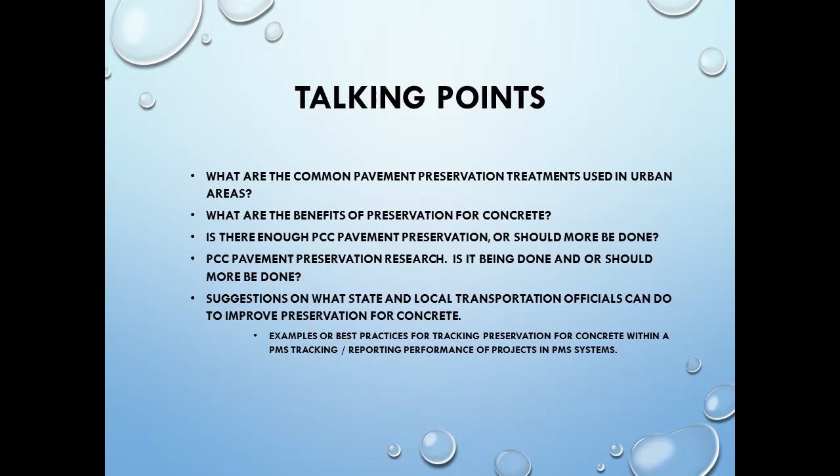So most people use composite statistics, which is why, in my mind, there's a huge need to figure out what's the right answer. We can't all be right. So anyway, any questions? Well, thank you.